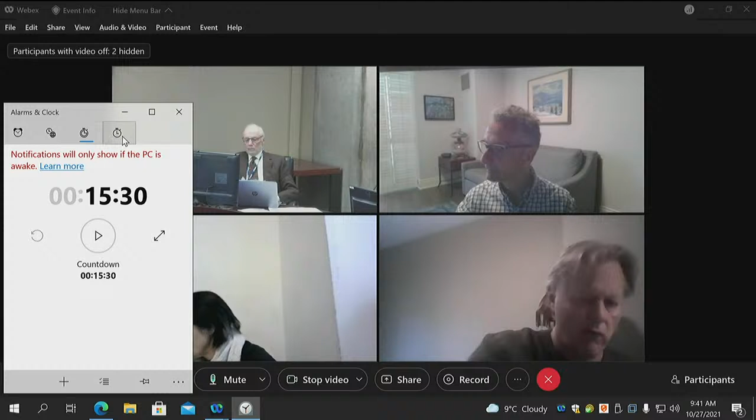Good morning. During the declared emergency in the City of Toronto, Committee of Adjustment virtual public hearings are being conducted by electronic means through WebEx, an online digital platform, and streamed on the Toronto City Planning YouTube channel. These measures are necessary to comply with physical distancing requirements and a provincial order that limits attendance at public gatherings.

This will be a virtual public hearing, and participants who have registered in advance will be able to make their presentations to the committee using WebEx, an online event moderated by city staff. Anyone wishing to view the hearing may do so by watching on YouTube. Participants who have registered in advance will be connecting either by computer, phone, or tablet app, or by telephone. All participants will automatically be muted on entry.

When your item is called, each participant will be unmuted by the moderator, one person at a time. Only the committee members will be participating by video. Any registered participants will be participating by audio only. We ask that you also mute your devices until you are called on to speak.

We acknowledge the land we are meeting on is the traditional territory of many nations, including the Mississaugas of the Credit, the Anishinaabe, the Chippewa, the Haudenosaunee, and the Wendat peoples, and is now home to many diverse First Nations, Inuit, and Métis peoples. We also acknowledge that Toronto is covered by Treaty 13 with the Mississaugas of the Credit.

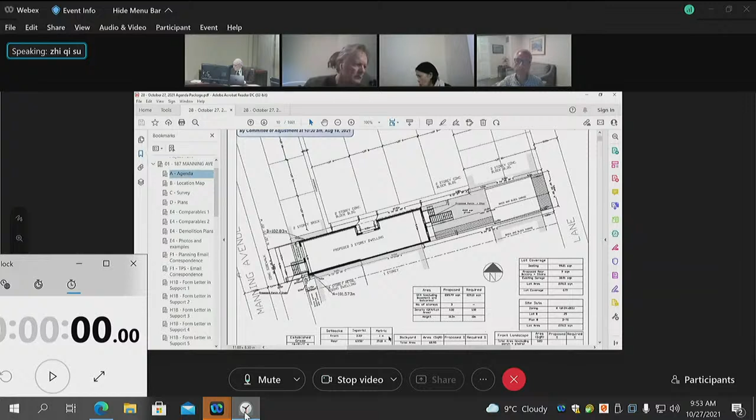We are proposing a full second story addition and third story additions with a stair walkout from the back of the basement. Soft landscaping exists in current conditions, so no variance is needed, and we even have more green space than before. The house is maintained the same as the neighbors, same neighborhood characteristic. As per the support documents, there are other 3-story buildings in the neighborhood.

We also had a chat with the neighbors, and we got 7 letters of support, and so far I haven't noticed any opposition to the application when we talked to the neighbors. But we are welcome to hear their concerns, and then we can adjust it if needed.

Okay, thank you. Panel, any questions? Okay, so let's move to Lena Lynn. Through you, Mr. Chair, Lena Lynn is not online, but Bruce Chow of the same address is. Okay, Mr. Chow. Hi, good morning everyone, I just have a few suggestions. My name is Bruce Chow at 185 Manning Avenue.

So I want to start with variance number 2. The rear second story balcony is located 0 meters from the south side lot line. Could it be set back like 0.9 meters, because it's basically touching 185 Manning, and anyone on the balcony will have a good view into the next building. So for privacy reasons, I strongly suggest the setback.

And for variance number 3, the height of the proposed external main walls will be 9.5 meters, which is 2 meters over the permitted height. Together with variance number 3 and 9, the overall height is 10.3 meters, which is 0.3 meters over the permitted height. Can we go back to the top with the site plan, page 1?

Yes, so can you zoom in here? As you can see, the rear building of 185 is only a 1-story building, so the height difference with 187 will be over 6 meters. As a result, the overflow of rain and snow will fall on 185's flat roof. This creates a serious safety hazard in the future for us. Even with proper maintenance, the overflow of rain and snow would cause leaking.

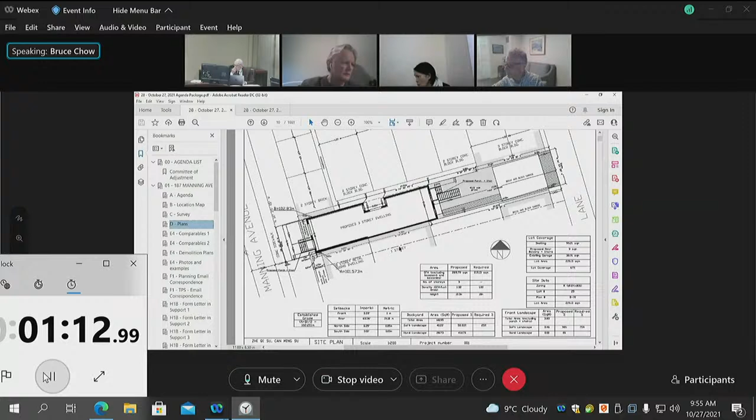The second point I want to talk about is that we also have a skylight on the roof, so it's going to block the lighting because we have a flat roof on top as well.

And then for variance 5 and 6, could we look at the plan comparables Mr. Su submitted? Yes, this one here, thank you. So according to this, Mr. Su provided 3 listings. The first is the height of the exterior walls greater than 10 meters. The second is a building depth more than 18.3 meters. The last is the floor index, more than 1.37. Now, if you cross-check all 3 lists, there's no building that has all 3 criteria.

Additionally, the properties that have height approved more than 10 meters are all attached 2-story buildings. However, in our case, the proposed building is attached as just a 1-story building.

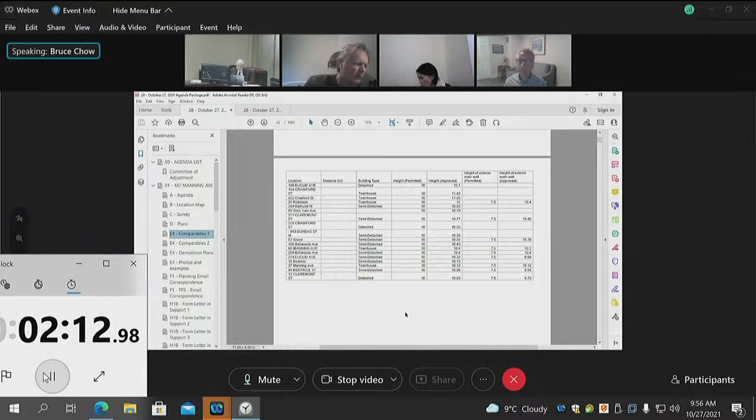Okay, Li Zhang? Yes, here. Can we have your name and address for the record, please? Yes, Li Zhang, 46 Begonia Street. Can we have your submissions?

Sure. I have a main concern and object to variance number, especially number 2 and 4. Number 2, the setback for the rear second-story balcony is supposed to be 0.9 meters as per bylaw. Now the proposed building changed it to 0 meters from the south side. So this change is huge, it's not minor as I understand it.

And also number 4, the maximum permitted height of the side exterior main wall facing a side lot line is supposed to be 7.5 meters, and the proposed building's side exterior main wall facing a side lot line will be 9.5, which is about 26% exceeding the bylaw requirement. So I think those will cause shadowing and overlook impact to the neighborhood property, and it should not be considered minor.

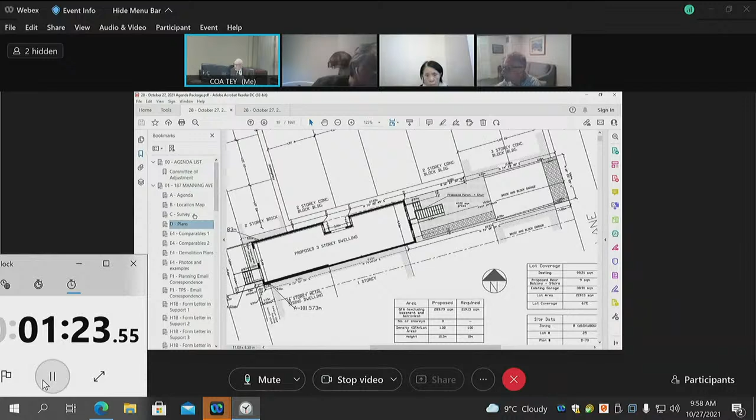Okay, thank you very much. No problem. Mr. Su? Regarding the concern that the neighbor has about the balcony, we are going to have a privacy screen, so there are no overlook issues. And if the neighbor wants us to build a wall on the balcony, there are no overlook or privacy issues. We're willing to accommodate that.

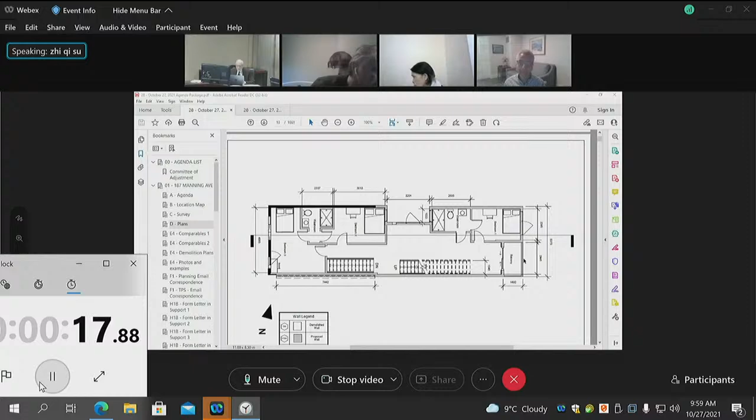Regarding the side exterior main wall height of 9.5 meters, we see that quite commonly in the neighborhood, since some neighbors are building up to a 9.99 side wall building height. Regarding the sunlight shadow impact, we took a couple of photos and have not seen an impact, because the building direction is facing west and east, so we don't see the direct impact because of the building height.

That's based on what we can see. And the length of the buildings, as we can see, 181 is much longer than us as well. And for 183 Manning Avenue, the length is 19 point something meters, or 18 point something, longer than our proposed 18.45 meter building depth. So we believe it's a reasonable length and a reasonable height.

Okay, Panel, do you have any questions? Yes, Nimrod? Yeah, I had a question about the number of stories on the building. If we can turn to the side elevation, I thought I had seen some type of entryway on one of the side elevations.

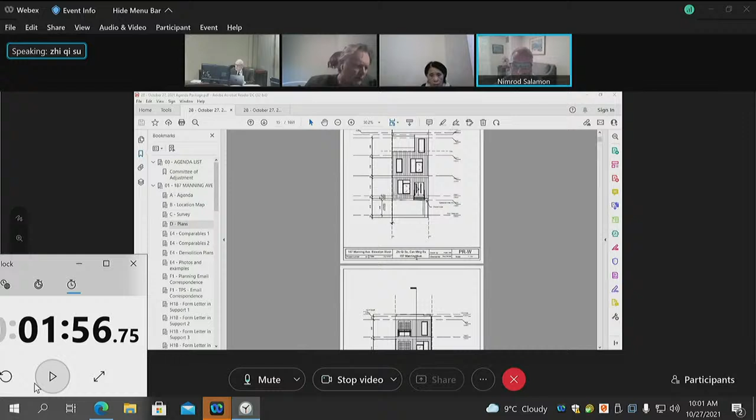So it wasn't clear. Is that a door on that side? I thought that was below grade. That is for the light well, it's not an entryway, it's access to clean up the light well, and that's why it will be there. This is the north side of the building.

I see, so it is a 3-story building on the side. Yes, correct. Thank you. Any further questions, panel? Okay, we go into committee. Anybody have any comments?

Yes, Nimrod? I think there are a lot of variances being proposed. I did have some concern with the balcony, so if this was to be approved, I would suggest there be some privacy screening put up on that rear balcony as well. I think overall, though, the variances in my mind appear to be minor in nature.

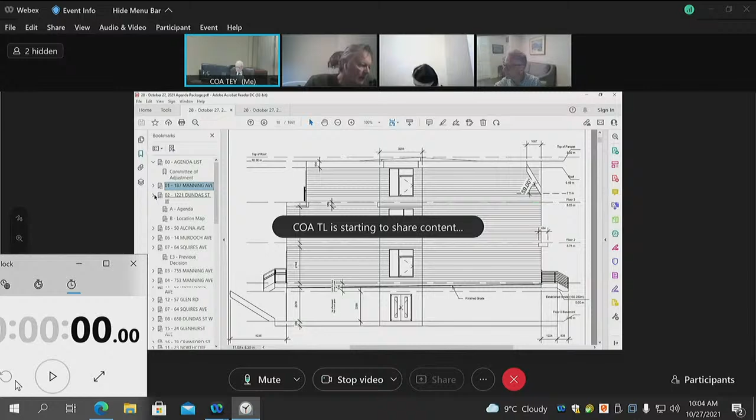Number 2, 1221 Dundas Street West. The purpose of the application is to alter the existing 2-story commercial building by performing interior alterations in the basement and 2nd story to increase the gross floor area.

I've either lost or I don't have number 2, I don't have the sheet for this property. Through you, Mr. Chair, we have the materials submitted by the applicant, a covering letter, as well as a previous decision affecting the subject property.

Okay. Speaker Bob Green, please. Yes, I am here. Could you give us your name and address for the record, please? My name is Robert Green from CGL Architects, and our address is 156 Avenue Road, Toronto.

I don't believe we need a presentation from you. There's no opposition and there's only one variance. Do you have anything you'd like to say to the panel before we go into committee? No, based on what you just said, I don't really have a lot to say.

I did have prepared words. The only thing I would say specifically on the variance is that the completely proposed additional floor area is completely within the approved building footprint and will not alter the approved exterior elevations, and accordingly there will be no adverse impacts regarding setbacks, height, or shadowing.

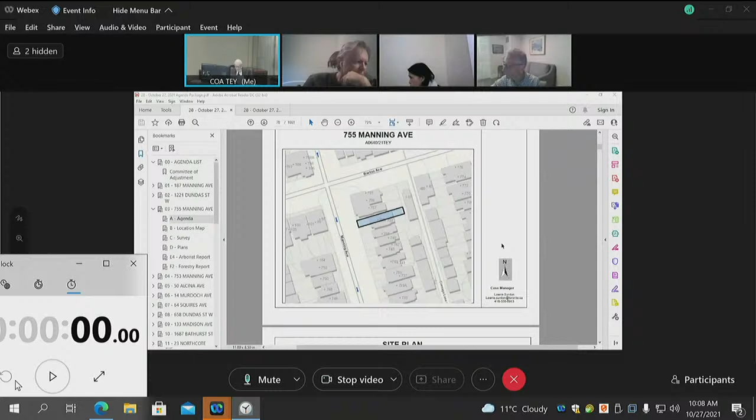Mr. Sandhu? Yes, sir. Can we have your name and your address, please? My name is Raman Sandhu. I am from Marvel Engineering, which is at 151 the Westway, Toronto.

Okay, can we have a very brief presentation? There is some opposition. Sorry, through you, Mr. Chair. All right, just a minute. Go ahead. I'm trying to contact Danny Reeses, which is the interested party, but I can't get hold of him. Mr. Reeses? That's correct.

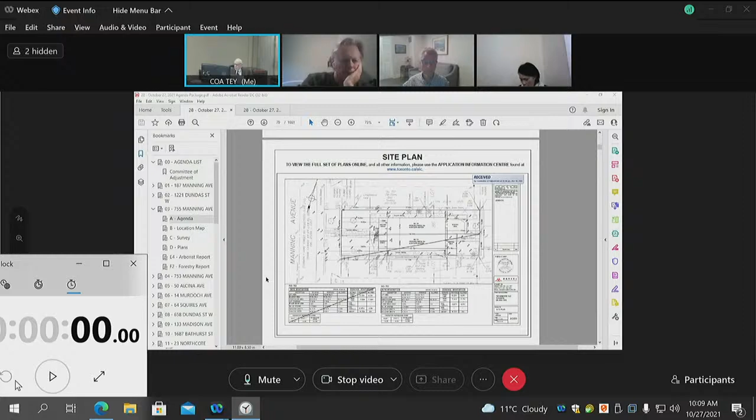Okay, all right, Mr. Sandhu. There is no opposition online, so I think we'll take it into committee. I don't think we need a presentation from you. Do you have anything to say before we go into committee?

No, I mean, the proposal is pretty straightforward. We try to keep the impact to minimum. And if it is Danny Reeses, he is the owner of these 2 properties. Oh, so that might not be real opposition. Okay, it's not real opposition.

Okay, thank you. Panel, any questions? Yes, Larry? Chair, I just wonder if we can note that item 4 is the adjacent door. I just wanted to ask the applicant, the 2 houses you're proposing, are they basically the same houses?

If that question is for me, yeah, the proposal in terms of the building is pretty much the same, but the actual size of the lots is a little different. So if you see the GFA ratios, they are a little different, but the size is pretty much the same in terms of the actual building.

Okay, thank you. Thanks. Okay, any further questions, comments, or do we have a motion? Yes, Nimrod? Yeah, I think the variances are minor in nature, and I know that there are other three-story homes on the street. So I would move approval with Urban Forestry conditions number 1 and 2.

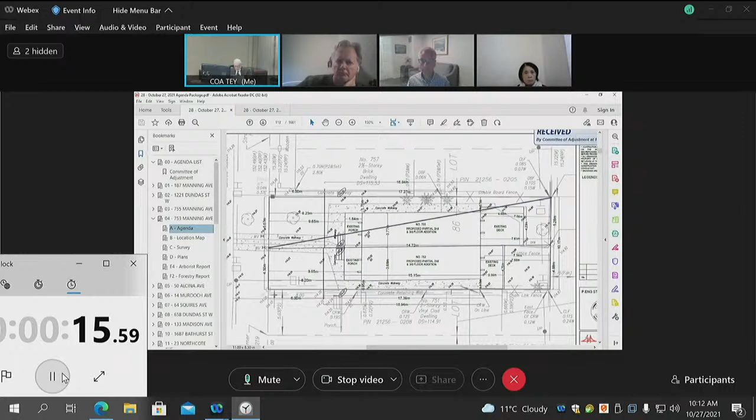I believe you already made a comment on this when asked a question by Mr. Clay. Panel, do you have any further questions, or can we move to a motion? I would move for a motion. This is similar to the previous application. In this case, there are only 2 variances, and I believe they are minor in nature. I would move approval subject to urban forestry conditions 1 and 2. Yim, do you second that motion? All in favor? You have your approval, sir. Thank you.

Okay, number 5, ALCINA Avenue. Purpose of this application is to construct a new 3-story detached dwelling and a rear 2-story ancillary building containing a laneway suite. With this application, we have material submitted by the applicant, a report from engineering, and 10 form letters in support.

Mr. Barrett. Good morning, committee members, Mr. Chair. I am Graham Barrett of 1575 Dundas Street West, agent for the owners of 50 ALCINA Avenue. I don't believe we need a presentation. There's no opposition. Mr. Barrett, do you have anything to say before I take it into committee?

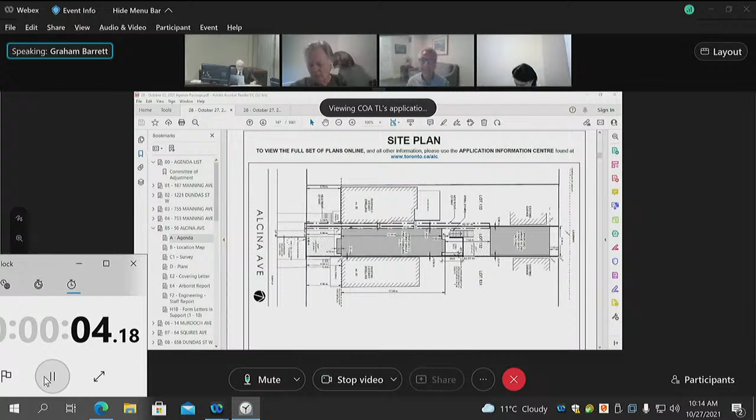Yes, just 2 quick points. We did receive an additional letter of support from 54 ALCINA, which is a late submission - I've sent it to staff. We appreciate their support in this matter. Also, I'd like to mention the ECS report. I've read through it, shared it with the designer, and active or passive fire protection can and will be installed. There's also a fire hydrant located in front of 54 ALCINA, which according to my measurements is approximately 38 meters from the ancillary buildings. So all conditions in that report can be met.

Thank you. Panel, do you have any questions? Yes, Larry - just a quick one. First of all, it was great to see a laneway suite that doesn't have a height or width or depth variance, so thank you for that. I just wanted to confirm the 45-degree angle plane. It looks to me from the plans that it's a very small portion of the laneway suite that intersects the 45 degrees. Is that your interpretation as well?

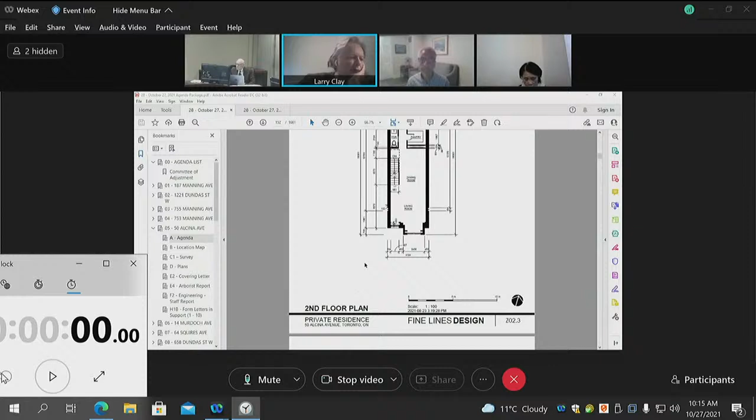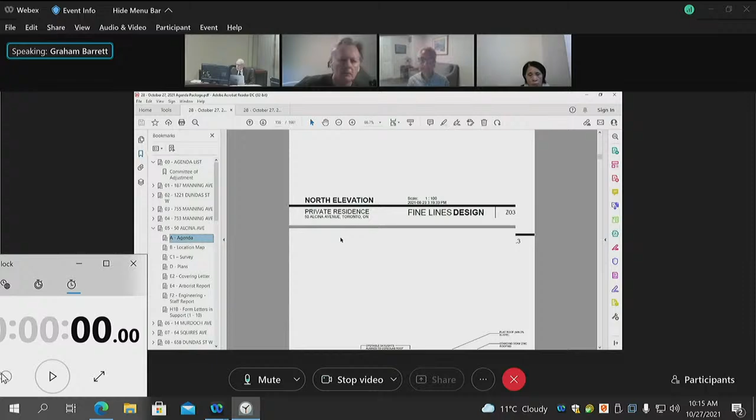Absolutely. If you look at the presentation materials I submitted, there's a cover letter and several images, with a highlighted version of the plans. If you scroll to the east elevation of the laneway suite, that should be page 8. You will see the very small corner of the second story that projects into the angular plane. I'm not sure if you're looking at the correct file, but my cover letter and supporting material - it should be page 8. So that is where that variance is. If you go to the next page, you see it from the other elevation. It's an exceedingly minor projection into the 45-degree angular plane.

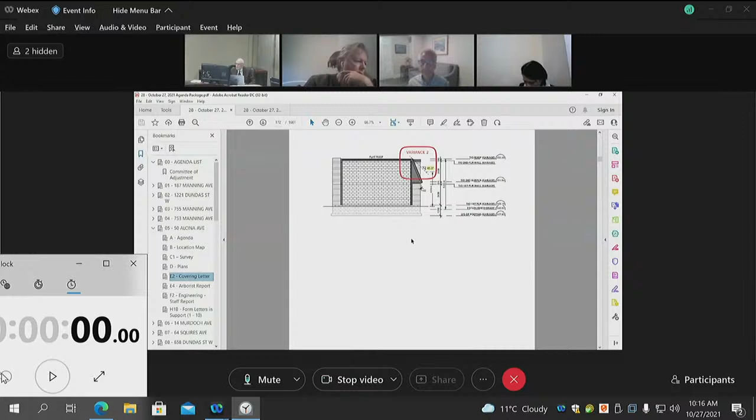Okay, any further questions? Any comments, or do we have a motion? I'm happy - I thought this was a really good proposal. I thought the lane for the new laneway suite was appropriate for the neighborhood, and I'm pleased to see very few minor variances requested. These are the kind of applications we love to see. It fits in with the neighborhood, and the community support from the neighbors and surrounding area is good. I'd like to move approval of the application subject to the standard engineering conditions.

Okay, Larry, you're a little garbled - I don't know whether you can move closer to the speaker, but your speech is a little garbled. Is that better now? Yes, okay, I apologize. It's okay, I was very eloquent in my first portion, I don't want to repeat it, but... No, it's fine, we heard you, but it was just a little garbled.

Okay, Nimrod, are you seconding the motion? Yes. All in favor? You have your approval, sir. Thank you, wonderful, thank you very much, have a great day.

Number 6, 14 Murdoch Avenue. The purpose of the application is to alter the existing 2-story semi-detached dwelling by constructing a rear second-story addition. With this application, we have material submitted by the applicant.

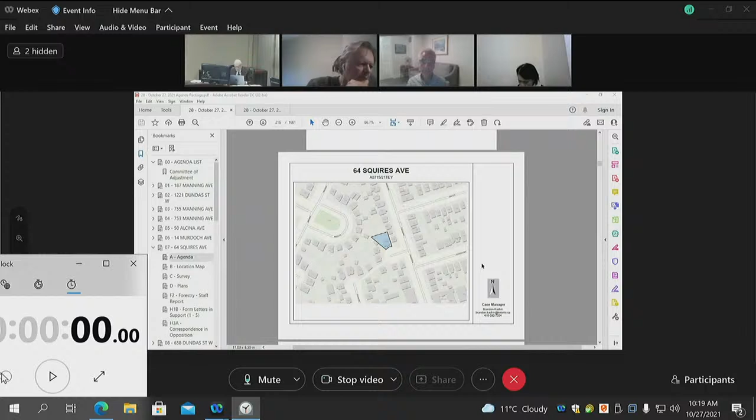Dale Theriault. Good morning, Mr. Chairman, committee members. I'm Dale Theriault, the agent and applicant for this file. Could we have just a very brief idea of what you're doing here, what the variances are?

Absolutely, sir. We're proposing to construct a new 2-story house, demolishing the existing 1.5-story house on the property. We're looking at minor variances for the front yard, side yard, and rear yard. Most of them are very minor and more technical variances, particularly in the front yard. The main reason we're asking relief is the existing house doesn't even meet the current bylaw.

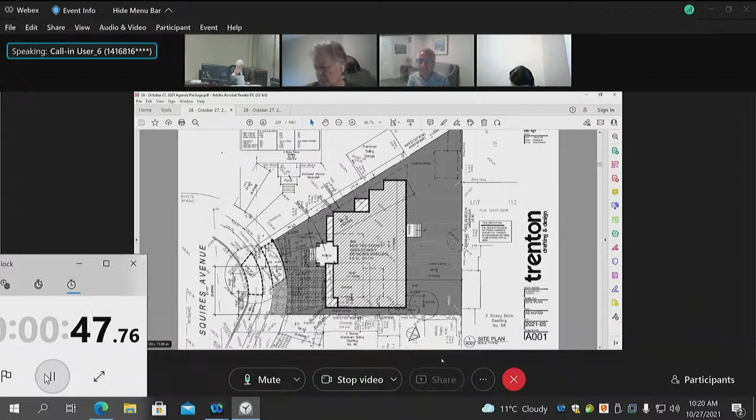The current house has a setback of 2.57 meters. The required is 6.13, and we're requesting 5.1. For side yards, we're requesting relief going from 1.2 down to 0.9. For the rear yard, we're looking for relief going from 7.5 to approximately 7.4, so they're very minor in nature. We're also looking for relief on coverage, going from the maximum permitted 35 to 40%, and for GFA, an increase from 0.6, which is permitted, to 0.63.

Okay, thank you. Panel, do you have any questions? We go into committee. Any comments, or do we have a motion?

Nimrod: While there are quite a few variances proposed, I believe they are quite minor in nature, so I would move approval of the variances with conditions, urban forestry condition number 1. Do we have a seconder? Larry. Thank you. All in favor? Approved, sir. Thank you.

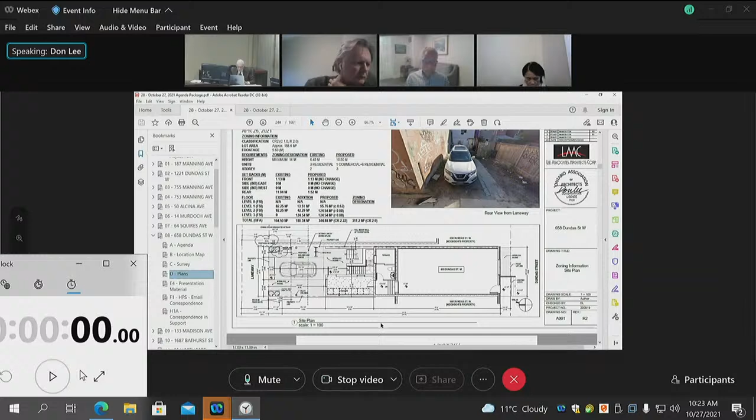Dong Hwan Lee. Hello. Hi, Mr. Chair and committee members, thank you very much for your time today. I'm Don, the architect, on behalf of the owner, 45 Shepherd Avenue. The existing building has 2 stories above grade and 1 below, in the CR2 zone.

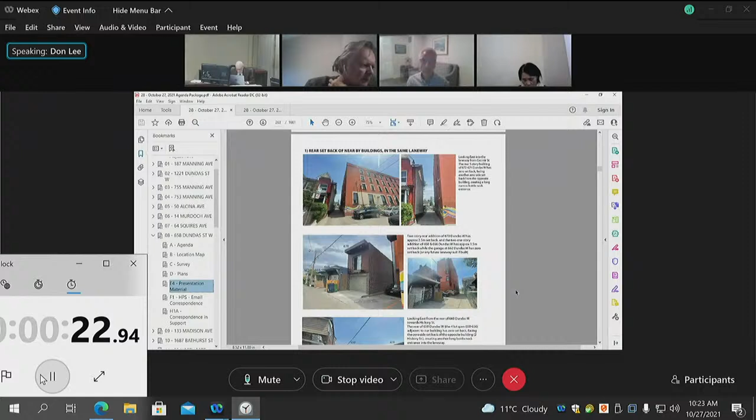There is 1 dwelling unit on the ground floor and 2 dwelling units above. The proposed design converts the ground floor dwelling unit into a retail commercial unit, and the 2 dwelling units on the 2nd floor into 3 dwelling units by adding 1 more unit inside the addition. A new 3rd floor addition will also have 3 dwelling units, so there are 6 dwelling units and 1 commercial unit in the new proposed 3-story building design.

On the progress of the proposed design, some minor variances came out. The rear yard setback required is 7.5 meters, whereas the proposed setback is 5.54 meters. As you can see in the picture on the drawing, or the supporting document, many existing neighboring buildings are sitting on rear lot lines or very close to the line.

Second, the non-residential unit on the ground floor must be on the street level or accessed by only under a 4% slope ramp. It is almost impossible for the existing building with a small lot. This is very common, as referred to in the pictures.

Floor space index of a mixed-use building is 2 times the area of the lot. This proposed plan has 2.22 times the area of the lot, so around 33 square meters exceed the designated 311 square meters.

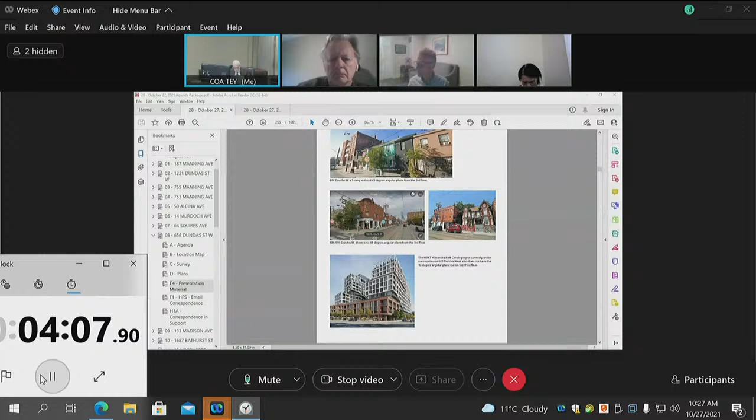Well, we're still having trouble hearing you. Can you hear me? We can hear you, but I don't know whether you're swallowing your words or the mic's swallowing your words. We're only hearing a portion of what you're saying. But I understand you've set out the 3 variances that are on our notice, so do you have anything more to say before I go to the opposition? No, that's it. Okay, thank you.

David Ciobotaru. Yes, can you hear me? Yes, we can. Can you hear me? Yes, we can hear you. Thank you. So I'm here on behalf, I'm a licensed paralegal, and I was retained by the tenants who reside in the unit.

The tenants are vehemently objecting to any variation here. All right, sir, can we have your name and address for the record?

Of course, my name starts with initial D for David, my last name is spelled Ciobotaru. My address is 385 Connie Crescent, Vaughan, Ontario. What's the postal code here? No, it's okay, we don't need your postal code, sir.

Thank you. So could you tell us what your client's objections are? My client's objection is that they've been residential tenants. One of the clients actually owned the house at some point. It's a residential house where they've resided for in excess of 20 or 25 years. It's been through a few evolutions of landlords or owners of the property, and there have been many attempts to evict these tenants for various reasons. This is their home.

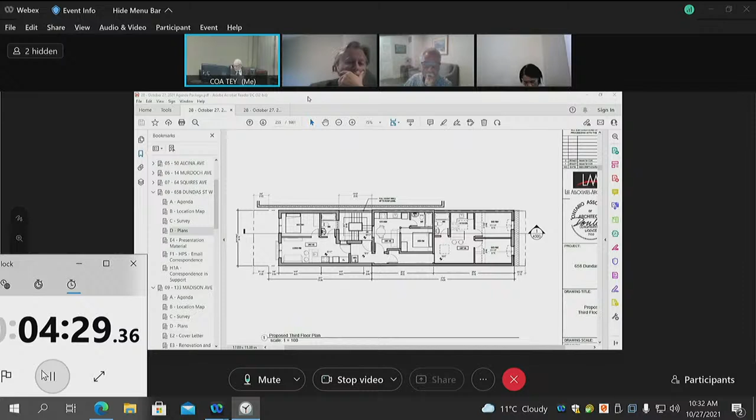Okay, and what we didn't hear is whether, if this is approved, will they have to be uprooted in order for this work to be done? Well, where are these people going to go? I don't know that, and that's, as I said, not within our mandate, but we will go back to the agent once we have heard from all the opposition, and perhaps he will have an answer for you. So do you have any further submissions? Your time is running short.

Okay, I'm just going to close by asking the committee to consider the rights of the individuals who are going to be impacted by this action.

Thank you. Sir, do you represent all the tenants? There's a Mr. Lazarus who's listed. Do you represent him? Is it Ray Lazarus, Cat Lazarus? No, sorry, I'm representing Ray, Linda, and Quan Lee.

Okay, thank you. Nimrod, you have a question? Yes, I do. My question is, based on the floor plans, can you tell us where these individuals currently live on those floor plans?

And are their existing units going to be affected by the proposed new floor plans, if you can tell?

Is the question for me? Yes. Thank you. So whenever you have construction to the degree that you're proposing, these people are not going to be able to continue residing there.

It doesn't appear that way. Where are they going to go? You're going to construct, you're going to cut off the power, the water, and all that. I mean, these are human beings.

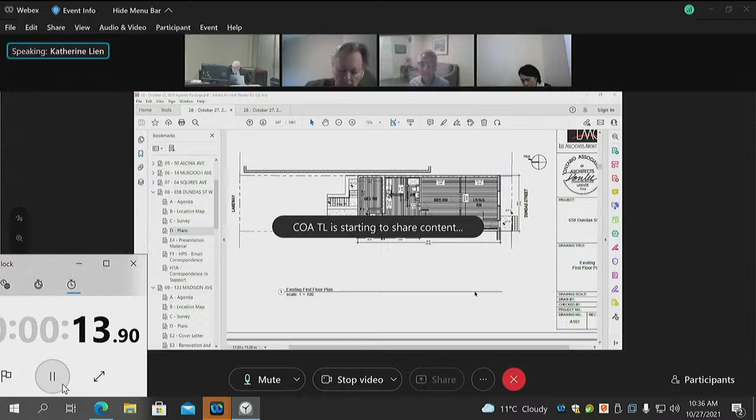Yes, there will be 6 new units, but if you look at the floor plan, 2 of them are quite small, under 400 square feet, and the other 4 units aren't suitable replacements. So yes, there are more units, but they're not quality units, they're very small.

Could you please speak into the microphone? I'm having a little trouble hearing you. Oh, sorry. That's better. Yes.

So the current tenants would be evicted from the main floor, which under the proposal will be changed into a commercial unit, and there are no suitable replacements because the 6 new units created are too small. 2 of the units, the middle ones, look to be about 400 square feet.

And more importantly, the current tenant, my mom, she's really old. She has some accessibility issues, so she needs to be on the first floor.

But the new 6 units, to access them you can only go through the stairs, and the only entrance is through the back.

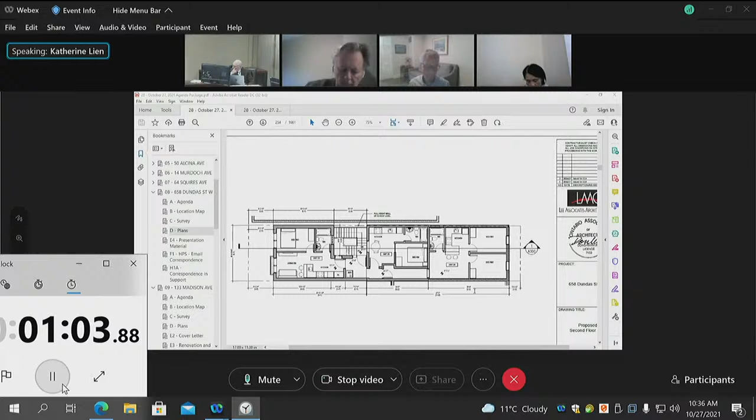And to get through the back, you have to go around from the main street, around into the laneway, and the laneway is not paved, it's not plowed in the winter, so there's lots of snow.

So it seems like a small variance. I guess this addresses the first variance, which is asking to omit the ramp or the commercial entrance.

So it seems like a small variance, but what it's doing is taking away one of the few main floor apartments in their neighborhood for a vulnerable portion of the population, and giving 6 inaccessible, more expensive units in the back.

And I also mentioned this is a multi-generational home. We've been living here since 1996. My sister went to school across the street. I graduated from school across the street, and now I have a child, and I come visit my parents very frequently, and I take them to the school across the street. This is a fantastic neighborhood for raising a family, for people of all different walks of life, because there's access to fresh food in Chinatown, there's a library, there's schools, there's a hospital.

And what this proposal is really doing is taking affordable housing from people and just changing it into a commercial storefront for profit, offering to replace it with 6 units that people can't really live in for a long time. These units aren't family friendly. If you look at the 6 units, you have to walk up 2 flights of stairs. If you have a family, how could you possibly go up and down with a stroller in the winter? And it's a barrier to access. The rent prices will be through the roof after construction, and the current landlords have not informed us about any of this. They've offered no replacement units, no compensation.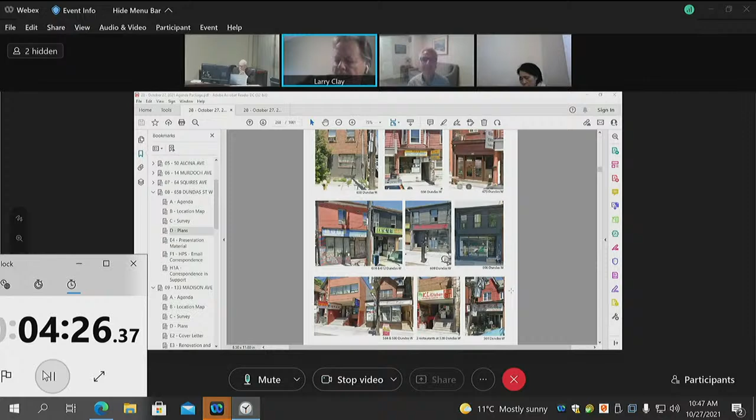Yes, Larry. I had the same concern. The reason those retail at-grade storefronts don't have ramps is that they are pre-existing and existed prior to the AODA being brought in. The fact that we're converting a use from residential to retail would in fact require accessibility compliance. So I don't think I need to reiterate it, but that was a pretty major concern on my part, not providing accessible access to the retail at grade front.

I'd also make the observation that as sympathetic as we are to the tenants, who are not before us today, Chair, you mentioned landlord and tenant, and there are provisions within that legislation that address these kinds of situations. I think we'd all recommend, if this gets approved, that the tenants pursue their legal rights under that legislation, the LTB.

All right, any further questions? Any comments? Are we going into committee? Any comments, or do we have a motion?

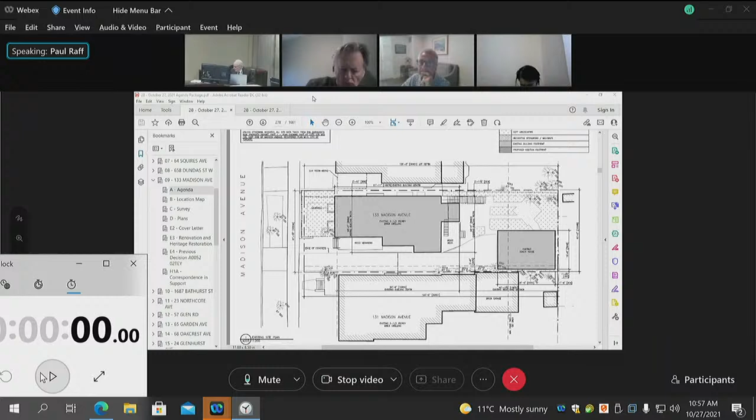Heritage does. We've had a detailed review - it is a heritage restoration project, and 2 out of 3 variances are for existing parking conditions. The variance requested is just for building depth, 22.395. Most of the excess building depth, as per the diagram we submitted, if you do want to look at our support materials, is subterranean - it's underground, it's not visible, it's in a rear yard storage space under the addition.

Yes, this diagram shows it, if you'd like to zoom in on that. There's the allowable building depth at the top, 17 meters, the proposed at the bottom, but it includes the below grade portion - it's only 19.33 building depth if you count what you actually can see from above grade anywhere. This is very much in keeping with the neighborhood - you can see how it relates to the neighbors on either side, both of which are in support of the application, and it's only 0.84 meters longer than the building is currently. Okay, thank you sir. Panel, any questions?

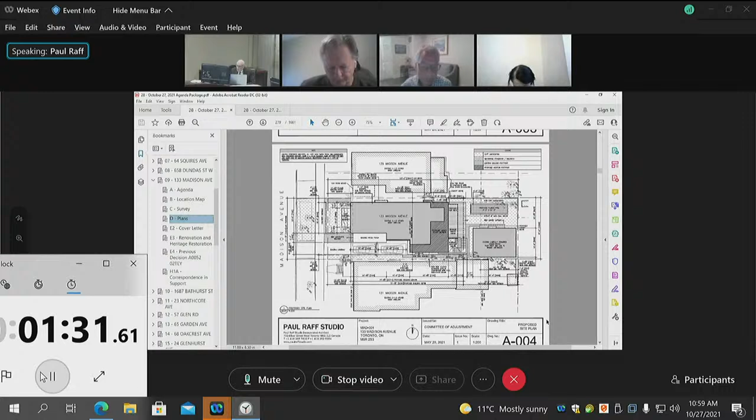Thank you. Okay, we'll go into committee. Any comments, or do we have a motion?

Yeah, my only comment would be is if this was to be approved, if we could add a condition that it be tied to the site plan. Yes, I think it's a good idea. Okay, so Nimrod, would you make a motion?

Sure. I think the variances are minor in nature, and I would move approval of the variances subject to heritage planning conditions and condition that the building depths be tied to the site plan.

All right, Yim, you second that motion? All right, all in favor? Have your approval, sir. Thank you very much. Number 11.

23 Northcote Avenue. Purpose of the application is to alter the existing 2.5-story townhouse by constructing a rear 2-story addition, a north side second floor bedroom walkout to the rooftop balcony, and construct a rear 2-story ancillary building containing a garage and a laneway suite.

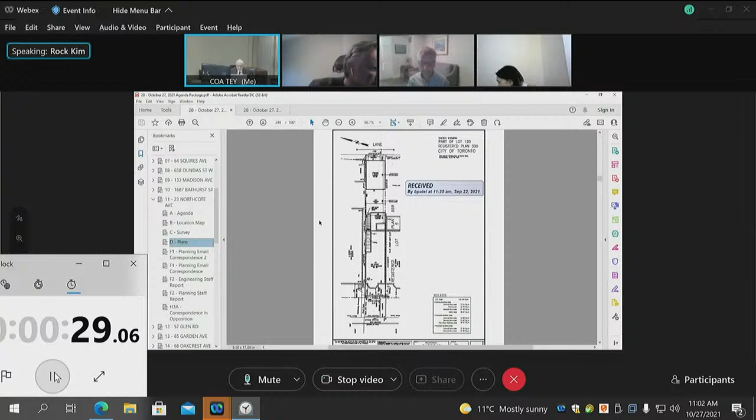Okay, we want to make the rear side 2-story addition of the existing house, and then the laneway house addition. We are trying to make the right north side shorter than number 25 and a little bit longer than number 21 of the addition part. At number 19, we are shorter; there is a house at 19, and 11 is longer than what we propose for the length of the house.

And then we are over the maximum requirement for gross floor area, which is 100%. We are over by 8%, at 108%, with what we are trying to do. And then for the laneway house, and the addition of the 3rd floor balcony, the owner wants to make a green roof space for maintenance access, but we are willing to change it to a flat roof.

It doesn't really matter, but it's not part of the committee, so that's why I didn't talk about this part. But we're going to negotiate with number 21, and we will talk about that because we are neighboring, right? So, and then for the laneway house, we have a setback from the backyard of 1.5 meters.

On your drawings, you're showing it in Imperial, first floor 10 feet, second floor 8 feet, and also 2 feet. What is that? Is that a railing? We want to make that like a roof, a green roof, so it's for maintenance access, the elevation safety. No, that's not what I'm asking. I'm asking what is 6.6?

Because in the variance it says you're asking for 6.55 height. Does that include the 2 feet of railing or roof or whatever it is? Yes, on the side elevation, that's including it. Yes, that's the 2 feet above the roof.

Railing for hooking up, for safety. Only on one side, yeah, only one side. Probably could be in the middle, but. And then the 6.55 meter, does that include the 2 feet? Yes, that's right.

If you minus the 2 feet, what is the height? Is it 5.94 meter? 5.9, so it will be in compliance with the height. That's correct. Yes. Okay.

All right, thank you. I just want to make sure, is that railing necessary, the 2 feet railing? Because it's not a proper railing anyway, right? Railing is 3 foot 6. This is not really a railing, it's a safety issue, they can hook up, it's not for the safety. It's for the maintenance of the green roof, but actually we can get rid of the green roof if it's not really necessary.

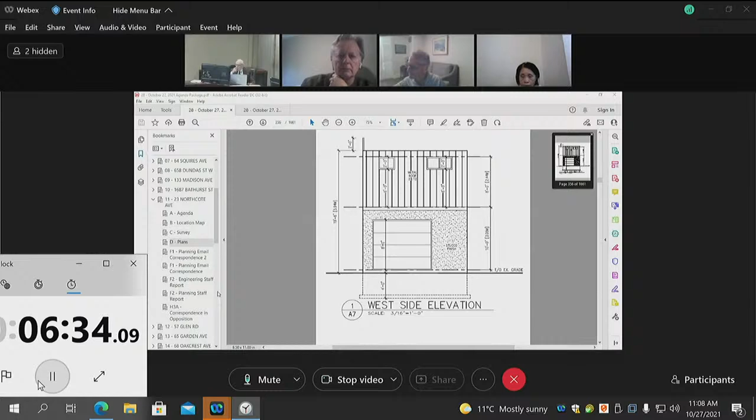Okay, that's why I thought to make sure that the extra height is not added to the Laneway house height. I'm not too sure why the railing is part of that.

Apparently that's a recommendation of planning, a railing on one side. It looks like it's more of a parapet than a railing, though, right? So maybe the nature of it would require it to be considered as part of the height.

Okay. Any further questions of this witness panel? Okay, Mr. Taggart, Ms. Berry.

Hi there, this is Madison Berry speaking at 21 Northcote. I don't have anything more to add than what was in the letter. While all the variance requests are minor in nature, the combination of requests does have us very concerned about the items mentioned in my letter. We've spoken with the owner, so we're not opposed to the creation of the Laneway house. Again, it's just a lot in combination with the other requests. So we're happy to continue that conversation with the owner, but no further commentary to add.

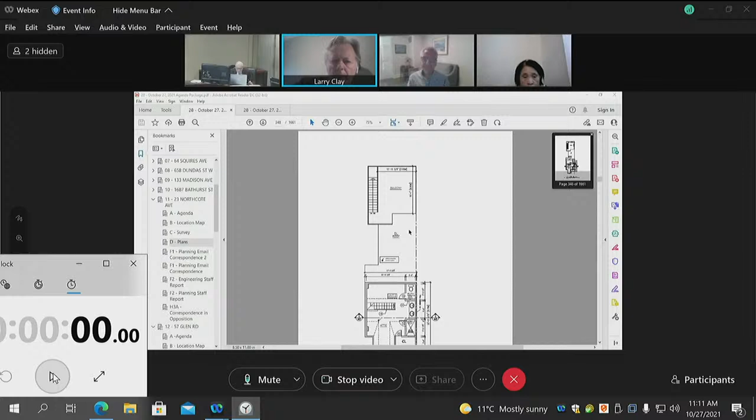Larry, I actually have a problem with the height for the Laneway house only because they're already asking for a reduced setback to have 6 meters, and we approved a lot of Laneway houses that have tighter setback but we still kept it at 6 meters. In this case, I would like to refuse the height variance for the Laneway house because they already gained some reduction. It was only if it's a reduced setback from the main house, they only allow 4 meters.

Okay, so I think even the drawings show that 6 meters will work for them. I think maybe we should just limit it to 6 meters, so maybe we can go back and look at that.

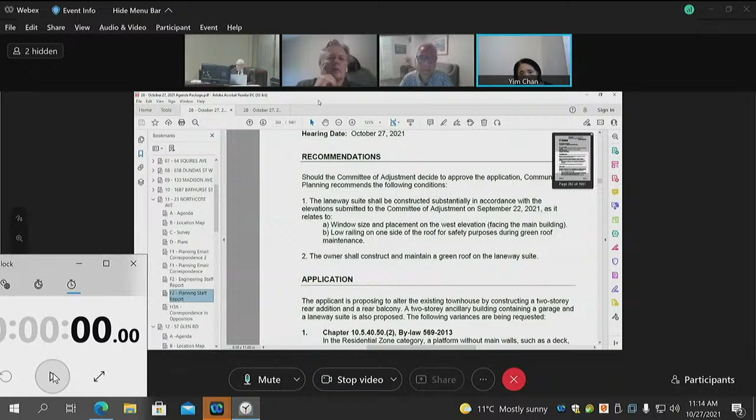Okay, so in that case, maybe we should tie it to the drawings then. I would agree with that, to add a condition that we tie the drawing, the height of the laneway suite, to the drawing so that it's clear what is allowed to go to that height.

If that's already in there, fair enough. I must have missed it when I was reviewing this. Okay, any further questions, or do we have a motion? Sorry, I'm just looking at the planning report, maybe we can just go to that to see if there is in fact a condition, just to make sure.

It has two conditions. Oh, so there does not seem to be a condition about the main building privacy screening. I had thought I had seen that. Maybe it was in their comments and it never got in.

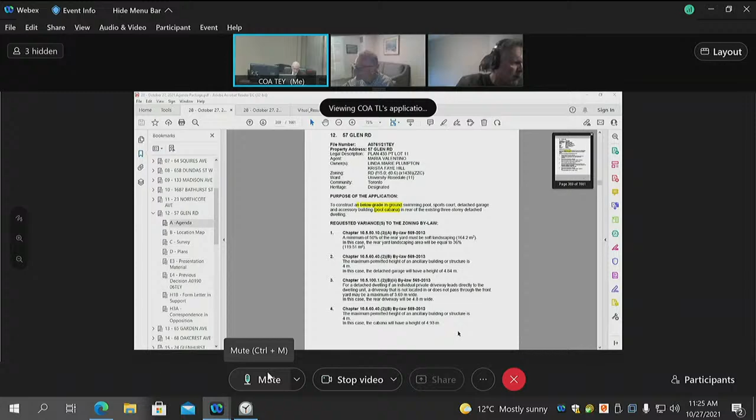Mr. Goldberg? Yes, good morning everyone, I am here. Can we have your name and address for the record, sir? Yes, my name is Michael Goldberg. I'm a principal at Goldberg Group, 2098 Avenue Road, Toronto, M5M 4A8.

All right, I don't think we need a presentation, there doesn't seem to be any opposition online, at least. Panel, so Mr. Goldberg, before we take it into committee, do you have anything to say to the panel? I'm aware of the letter from 38 Maple, and I have comments to provide if the committee would like to hear them. Otherwise, I'm quite happy not taking up the committee's time. All right, so perhaps you could address the issue raised by 38 Maple. Sure.

What I can indicate is 38 Maple is not adjacent to this property. It's one property removed. In between 38 Maple and the subject site, there is a distance of 60 feet or 18 meters. And in addition, you can see at the northwest corner of the adjacent house at 36, there's a very large two-story coach house. That coach house is 7.2 meters high.

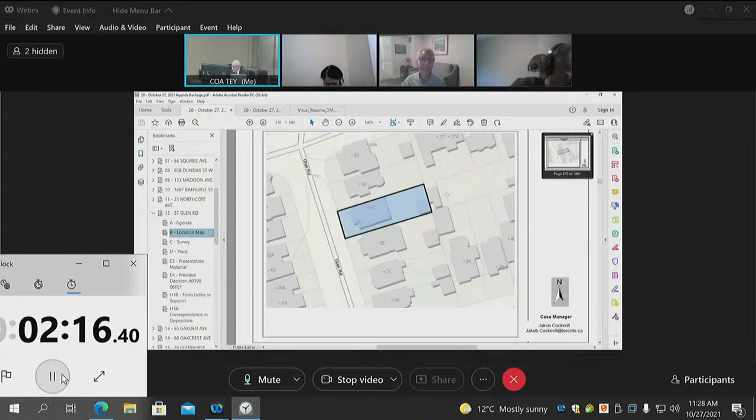Mr. Goldberg, could you just tell us what the sports court is? Is it a full basketball court, a tennis court, or what is it? Oh no, it's actually a rather small area, probably a quarter of a basketball court. It's like one side where someone could have one hoop and take shots from a foul line. There may be other equipment put in there, but that's the general size of it.

Okay, so it's less than half court. Oh, it's less than half court, yeah.

Okay, so do you have anything further to say, Mr. Goldberg? I don't. I would just say that if you look at the existing survey, the driveway is basically much more narrow than the existing driveway is today. There already is a basketball court in the widened part of the driveway today, and both the cabana and the proposed garage will be lower than the adjacent coach houses.

Which are straddled on a zero lot line to our east lot line, both of them there. So there is an opportunity to add landscape open space by way of a green roof on the garage because it's a flat roof, and we would be prepared to do that, and that would increase the landscaped open space from 36% to 41.5%. I leave that in the committee's hands as to whether you wish to make that amendment to the application or not, from 36 to 41.5 in variance number 1. We are fine either way.

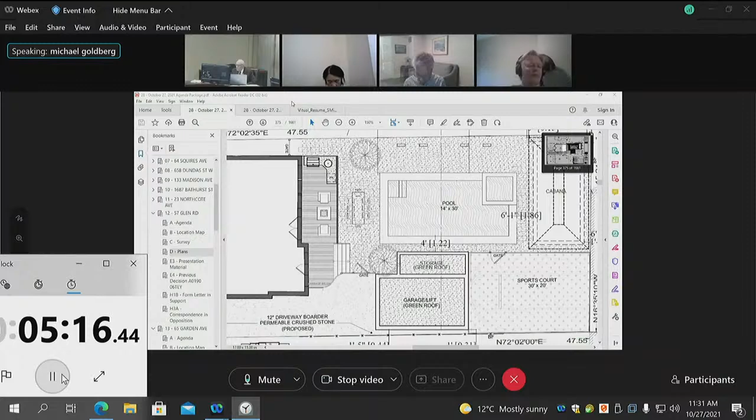Okay. Any comments, or do we have a motion? Yes, Nimrod? I believe the variances are minor in nature, and I would keep variance number 1 the way it is, and just add a condition of approval that there be a green roof on the storage shed and garage as shown on the site plan. Okay, do we have a seconder? Larry? All right.

Perhaps Sabrina, if we make it a condition that there be a green roof on the garage and storage, do we have to change variance number 1, or should we just approve it that way and make it a condition as Nimrod suggested? Through you, Mr. Chair, I believe the motion that's before us is okay to move forward with. Okay, so yes, the green roof on storage shed and garage as shown on the plans. Right, thank you. Okay, all in favor of the motion? You have your approval, Mr. Goldberg. Thank you.

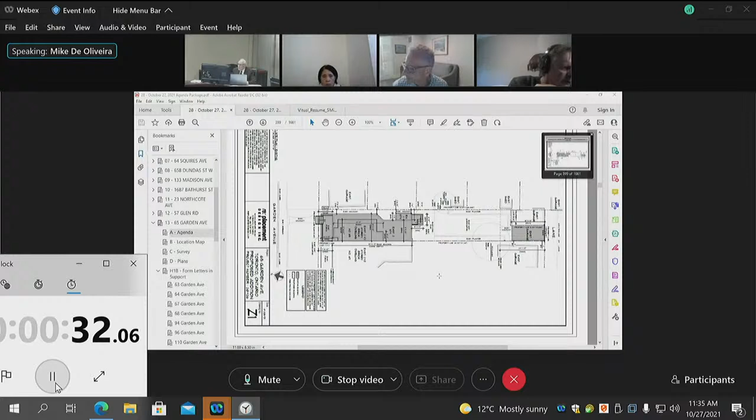Thank you. Panel, do you have any questions, or do we have a motion? Yes, Yim? I agree with the applicant's presentation. I think it's a straightforward application and there's no opposition. I move for approval with no conditions. Seconder?

Yeah, I did, maybe just before we go, I just wanted to acknowledge the applicant did a really good job of getting all the adjacent surrounding neighbors to support this, which means they've had several discussions with them. So that's the kind of stuff we really like to see on these applications. So I'll say that and second the motion.

All right, thank you. All in favor? You have your approval, sir. Thank you. Thank you very much.

Okay, number 14, 68 Oakcrest Avenue. Purpose of the application is to alter the existing two-story semi-detached dwelling by constructing a rear two-story addition and a rear ground floor porch. With this application, we have material submitted by the applicant, six form letters in support, and a report from Urban Forestry.

Audrey Kvedaris. Good morning, Mr. Chair and members of the committee. My name is Audrey Kvedaris and I live at 1 Ethelwyn Avenue, and I'm the agent for the project. Right, thank you.

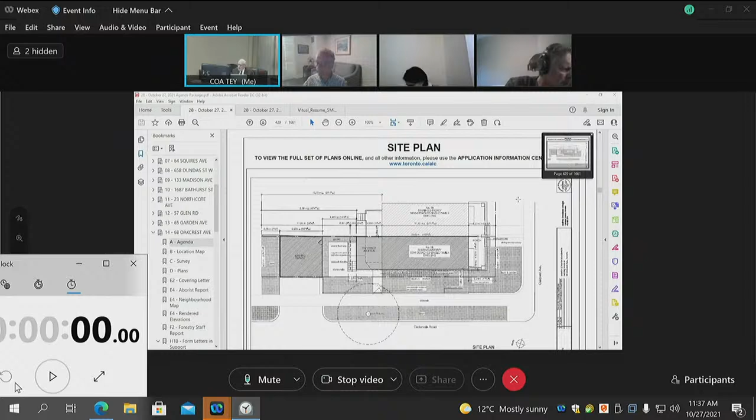We only have one variance. I don't think we need a presentation. Do you have anything to say before I take it into committee? Just one point in relation to the supporting plan that illustrates other minor variance applications in the area: the 0.81 is the average variance that was approved, and for homes of that vintage in the immediate area, 0.83 is the median approved gross floor space index.

Thank you. Panel, any questions, or do we have a motion? Yes, Nimrod? There's only one variance, like the chairman said, and I believe it is minor. The rear two-story addition is quite small, only 32 square meters in size. So I would move approval of the variance, and I believe there's a condition from Urban Forestry. Yes. Seconder? Yim? All right, all in favor? You have your approval, thank you.

Number 15, 24 Glenhurst Avenue. The purpose of the application is to alter the existing two-story semi-detached dwelling by constructing a rear ground floor deck. With this application, we have material submitted by the applicant, support from 26 and 22 Glenhurst, and four form letters in support from other addresses on Glenhurst Avenue.

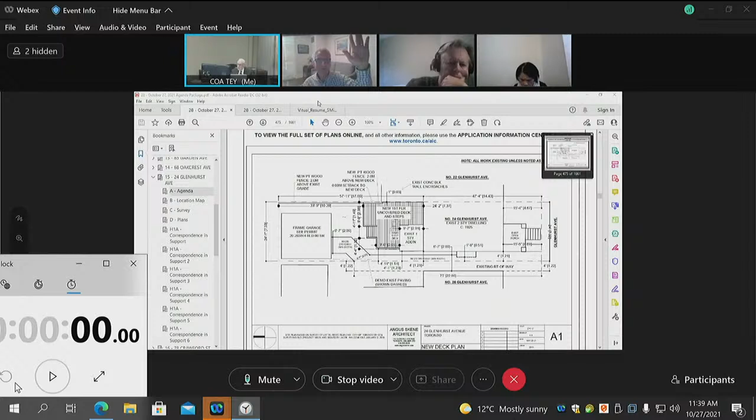Okay, so there is someone who wants to speak, I believe, in opposition. Through you, Mr. Chair, attempts were made to contact Marita Bellotta, but we couldn't get through. Oh, okay, there's no opposition then. So I'm going to take it into committee, Mr. Skene. Do you have anything to say before we take it into committee?

I actually do, in the sense that the owner spoke with the immediate neighbor, who I believe is the woman who wanted to speak in opposition, and I sent something through very early this morning. They had met last night, the two neighbors. My client, the resident of number 24, sent an email confirming the nature of their discussion last night. I just got that this morning, and staff were kind enough to send it to you as an email. It'll be in the supplementary information, but it shows that agreements were made, and none of the concerns had anything to do with the minor variance as such—it's deck issues and things like that. I can read the email if it's not accessible, if that's of interest.

Yeah, I don't—through you, Mr. Chair, that email came in this morning and it's up on the screen now. Can't read it, it's too small. Tiffany, can you—yeah, that's better. Nimrod, you have a question? Yeah, can we put up the site plan, and can the applicant explain how the rear yard soft landscaping is being calculated, and what's underneath the first floor deck and stairs? Yeah, for sure.

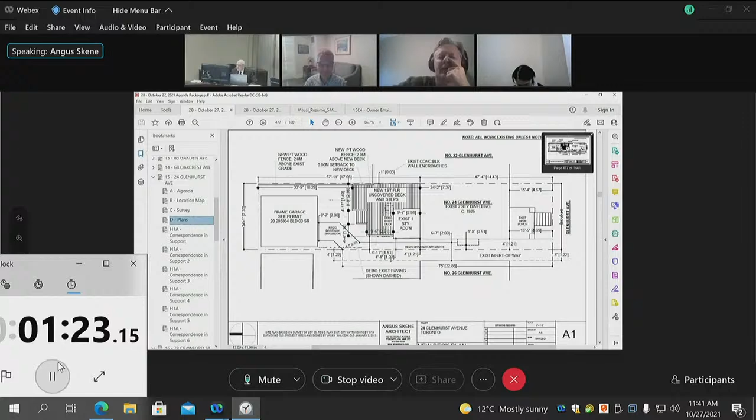The better drawing for rear yard soft landscaping is to click one page in on the PDF to the landscaping calculation. Does that help a little bit? So what you're seeing there is the way the bylaw works.

It delineates the rear yard initially to create the area that's called the rear yard. It then requires a 50% amount of soft landscaping. Now, anything that's hard landscaping in that rear yard area, such as the garage, the driveway that's required to reach

the required parking space, and the deck will all count as hard landscaping. So we end up with, if you look at the large calculations at the bottom, it says rear lot area, 120 square meters, soft LOS, which is landscape open space required, equals 50%, which equals 60. We provide 37. So the 37 number you see on the drawing with all those little dots, which are supposed to represent grass, that's the soft area. Everything else is considered hard.

And the truth is, with this property, like most of the properties in this area, underneath that deck is mostly already a concrete patio that's existed for years and years. And folks just prefer to be at the level of the first floor if they can. So much of what's being covered with the deck has always been covered with pavement. And I think actually we're pulling up a fair bit of pavement to create this new soft landscaping. So it's kind of a happy ending for the bylaw provision in that sense.

So you've increased the soft landscaping area? Yes, I think we have, yes.

Is the parking, is the car actually parking in the front yard as opposed to at the back? No, the way it works is these properties are required to provide the parking space in the rear yard, and a parking space has certain dimensions, as does the driveway. But if the driveway, under the bylaw, leads to an approved and required parking space behind the main front wall, you are allowed to park your car in the front yard on that driveway.

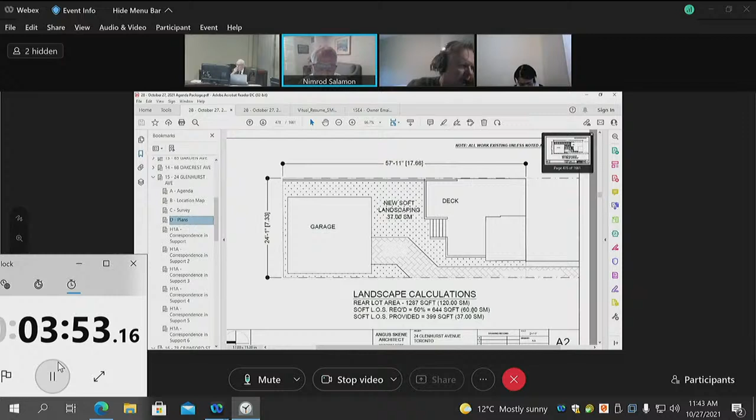So what material is the driveway in the rear yard, leading to the garage? On these kind of, to be honest, when I do these homeowner drawings, I'm according to the bylaw. So if you could click back, I don't know if I specify a material. If you click back on the site plan, it probably just says required driveway minimum width.

And on the drawing A2, if we click back to the soft landscaping one, sorry, I think you're going to find I haven't specified it. The little hatching pattern I'm putting down is a vague idea about interlock or something. But with these homeowner projects, my main thing is to make sure the homeowner understands the bylaw, like what is hard landscaping, what is soft. And homeowners make so many discretionary choices down the road with their contractors that I've long since stopped specifying a particular material.

But could you provide using permeable material for the portion of the driveway located in the rear yard? You know, the only permeable material is a funny thing because... I don't mind, and in fact, what I did today as a caution is I told the owner to sign on as a potential speaker in case any issues come up that they may want to comment on.

And so, to be honest, I'll give you my thoughts about permeable material. I would have to ask the owner if she minds me tying her to such a thing, I suppose. I don't think it's out of the question. The only reason I qualify it is the only permeable paving material that zoning examiners will consider as a soft landscaping alternate is the kind where it's almost like a concrete block goes into the ground and you get a little bit of grass like in the hollows of the concrete block.

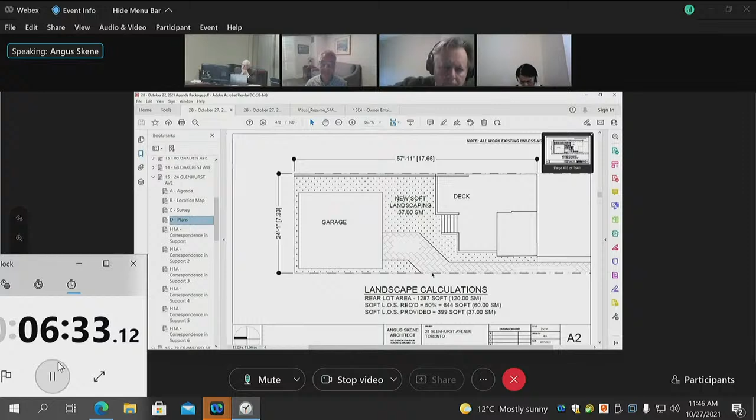All right, thank you. All right, Larry?

Just to follow up on that point, I do have personal experience with permeable pavers, and yes, the agent accurately says that is one form. I think what Nimrod and I and many panel members refer to when we talk about permeable pavers are the kind that use concrete blocks but employ what's called HPB, a granular material - not limestone screening, but a 1/4-inch crushed gravel - which acts as the bed for the stones and for the material that goes between the pavers. That provides a great deal of capacity for rainwater to permeate into the soil. That's kind of what we consider one of the standards, notwithstanding zoning inspectors may not consider that. We're just trying to get something more than traditional paving stone, which uses sand that restricts water from going through. So when we say permeable pavers, we're not suggesting you have to put in something that changes the percentage of your rear yard landscaping per the zoning examiner. What it does is incrementally improve upon the standard impermeable pavers in use in most situations across the city. So if that's helpful, that's what we're trying to get at - using construction material that allows rainwater to go through the cracks and discharge into the ground. I don't know, Chair, if that's helpful, but that's my experience.

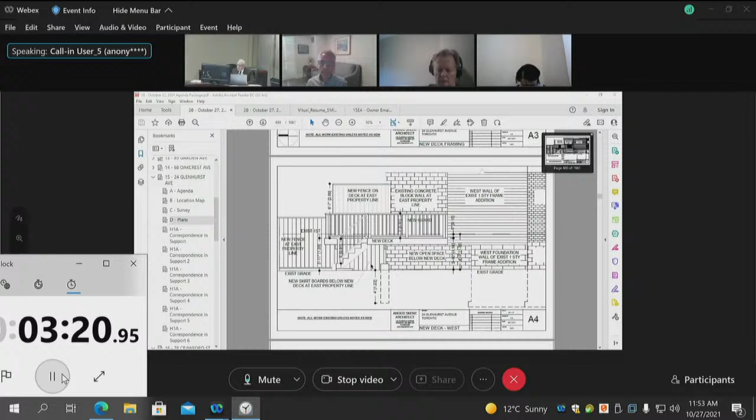That was one of them. The other was with regards to being set back from the wall of 22 Glenhurst. We also spoke about making sure there is no hardware or fence attached to this property, to 22. Right, so those are issues that are not before us. They are not variances. They are issues that perhaps, as was done between the neighbors... but let us go back to Mr. Skene and see what he has to say about these two issues.

Mr. Skene? Yes, I'm still here. Happily, in regard to one of the panel members' questions, the owner texted me several times about what HPB has installed to date and what they plan to install in the future. They would be happy if that is even attached as a condition to any decision.

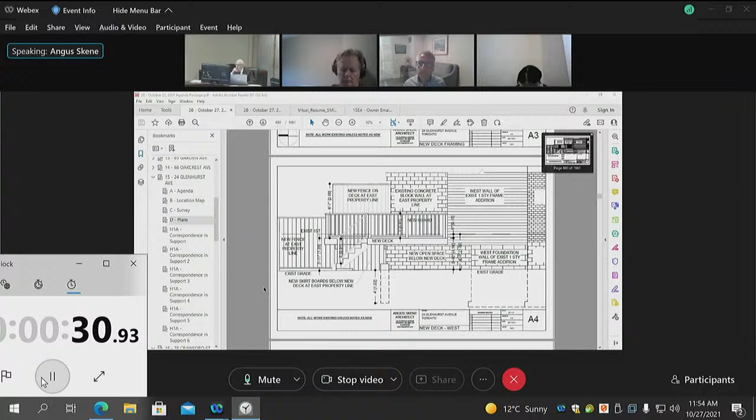And regarding the deck, the most useful drawing for the panel, and to answer the neighbor's question, is drawing A4. Sometimes these are a little confusing. It says existing first floor towards the left of the page, showing the first floor level of the house. If you slide over to the right-hand side, you'll see a dimension line going down 6 inches from the first floor to the top of the deck.

Below that, you'll see a dimension line of 3'10", 1.16 meters above grade. You can track those dimensions around. The deck is in compliance with the bylaw, but just to be straightforward with the neighbor, that tells you the height of the finished deck when it would be built.

The issue of the fence, there's a dimension line in the back showing 6'7", 2.0 meters, for a new fence on the deck at the east property line. That comes under the fence bylaw, which is the required maximum. My understanding is the owner of number 24 discussed this last night and is willing to reduce the fence height down to 1.5 meters if that's of interest to the neighbor. Regarding the building of this, if you flip to drawing A3, the page before this—no, go backwards one.

Unfortunately, a builder was hired who began this deck without a permit. There was a permit for the garage, and then they went over and started building the deck. The building inspector told them to stop, and that's when I became involved. So this detailed structural drawing is mine. I made it to make sense of what the builder had built and also to show how an actual deck would be built.

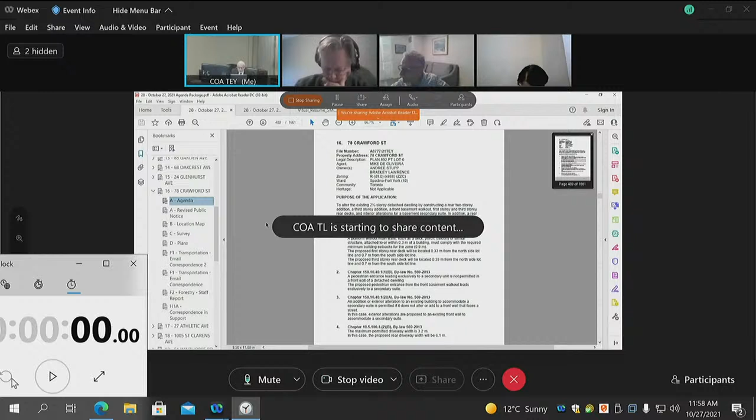Number 16, 78 Crawford Street. Purpose of this application is to alter the existing 2.5-story detached dwelling by constructing a rear 2-story addition, a rear 3rd-story addition, a front basement walkout, 1st-story and 3rd-story rear decks, and interior alterations for a basement secondary suite. In addition, a rear 1-story detached garage and driveway are proposed.

With this application, we have material submitted by the applicant, correspondence from Transportation Services, a report from Urban Forestry, and correspondence and support from 83 Shaw Street. We also have 4 form letters in support from 75, 83, and 98 Crawford Street.

Right, okay, Mr. De Oliveira. Hi, yes, I'm here. My name is Mike De Oliveira. I'm here acting on behalf of 78 Crawford Street, and I'm with Replacement Design, located at 911 Davenport Road.

So we need a brief presentation from you, Mr. De Oliveira. We have some opposition. Certainly. So we are seeking relief to the bylaw to create a third floor addition, a rear two-story addition, and a garage.

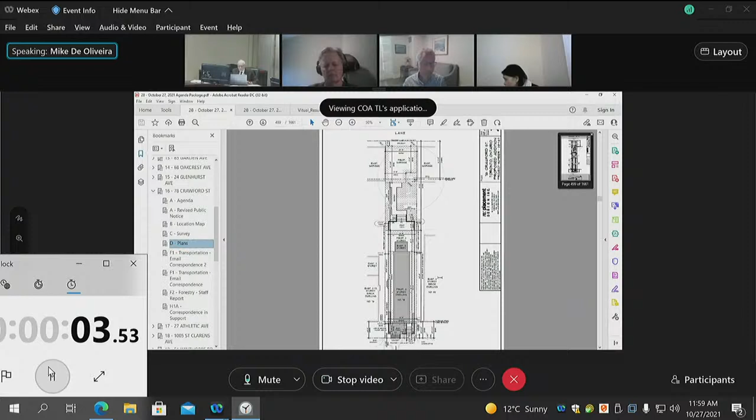The variances we are seeking today are in line with similar approvals the committee has made in the past, and our clients have spoken to many of the neighbors in the neighborhood, collecting the 5 letters of support mentioned, and they also received one last night from their next door neighbor at 82 Crawford.

The addresses on the street are a little awkward. To the left it's 76, then there's 78, and beside us on the right is 82. So that's the new letter we received yesterday. I just received confirmation that it was uploaded, but you might not see it at the moment.

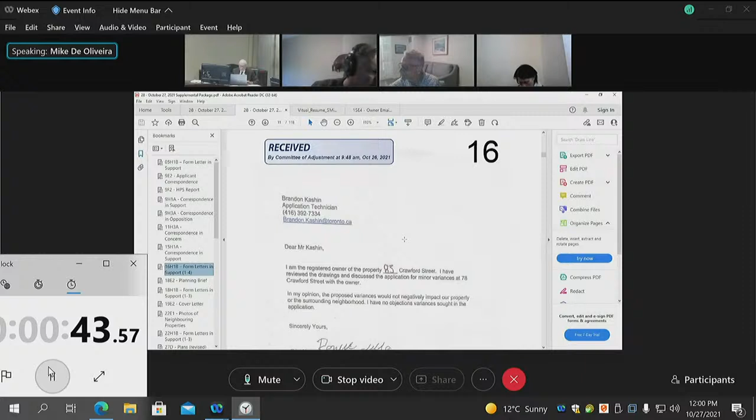Upon designing the addition, it was important to us and the homeowners that we limit the variances as much as possible. Although it might seem as if we have many given the look of variances, all of these are actually quite minor when you look at the current conditions of the existing property.

In many cases, we are simply continuing an existing condition, such as the landscaping in the front of the property and eave setbacks. In fact, even though we have a variance for soft landscaping in the rear, we are actually increasing the soft landscaping from 29%, which is the existing condition, to 38%.

Overall, as much of the area in the rear is already hard landscaping, our proposed addition and garage are simply being built over what is already considered to be hard landscape. Although we're asking for 1.1 floor space index, this is a difference of only 22.79 square meters, or 0.1 FSI in relation to the permitted.

We are also well below other approvals in the area. The example closest to us is 62 Crawford, a similar size lot. They were approved for 1.19. I'll open it up to any questions the committee may have, and to respond to the person in opposition.

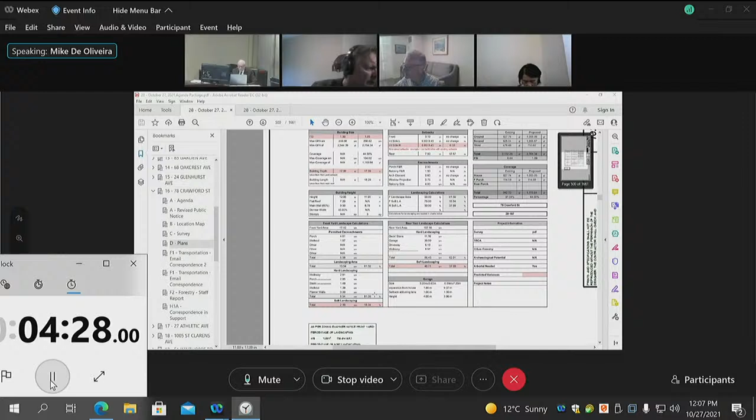So the existing soft landscaping in the front is only 35.86%. Overall, the actual number we're talking about doesn't change very much. The front is only 34.08 square feet currently. Our proposal is going to be 26.26. And the only difference really is for a little portion of walkway that needs to be added for the new basement stair walkout. Our basement stairs are going to be located fully within the existing front porch. We're just cutting back a bit of the front porch to allow for the stair down into the basement.

And this is pretty common throughout the city. 53, 55, 94, 103 Crawford, all of these are on the street and have similar types of basement walkouts. So this is pretty common, especially throughout this neighborhood. And although we do have a depth variance, this is well in line with other approvals that have been given in the neighborhood as well. 130, 144 Crawford, they have building depths that exceed 20 meters. We're only asking for 18. This is very minor compared to the 17 that's permitted.

So I think overall we're keeping the soft landscaping as much as possible here. I know there was a letter of objection posted from, I believe, the same neighbor as well that refers to trees. We've been working with an arborist from the get-go on this project to try and mitigate any injuries to the trees as much as possible. As you can see with our proposed garage, we're losing a corner in order to save that tree. I think we can all agree most people wouldn't be cutting off a bit of their garage if they could avoid it.

We've tried to do this to keep the tree in place. We're working with an arborist to do any necessary trimming needed to allow this to work while keeping the tree in good health. Our clients got possession of the property about a year ago, so no one's really been maintaining the trees for the past few years, and with all the overgrowth that can have adverse effects on the trees. Further trimming and working with urban forestry will mitigate any issues and push things forward while still giving the clients what they need. We also have no variances related to the garage.

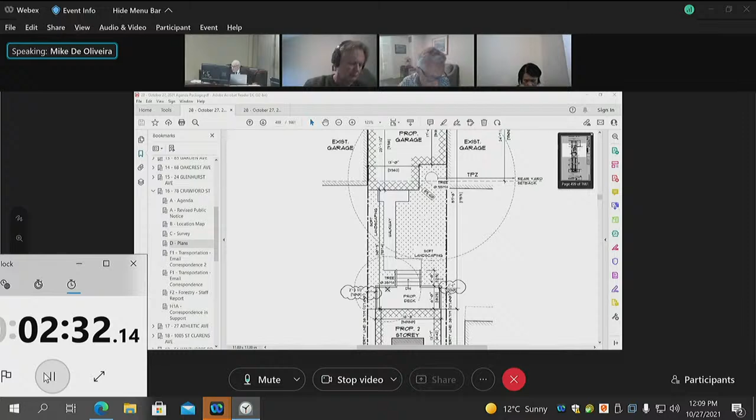I was going to ask you the same question about the front walkway, the walkout to the basement, if that could be permeable too. Yeah, that's certainly something the owners would be open to.

Okay, all right, thank you. Any further questions, panel?

All right, do we have comments or a motion? Yes, Yim?

Looking through the list of variances, quite a few of them are contributed by the existing condition. And with Neil's suggestion of permeable paver walkways front and rear, I am in support of the proposal because this is a very dense residential area, and I do not think the addition will be out of context. I think this creates not too much negative impact on the neighborhood.

All right, yes, Nimrod? So maybe if this were to be approved, we could add a condition that ties any approval to the site plans, specifically that the walkway shown in the rear yard be a permeable material, and that the walkout in the front yard also be a permeable material as shown on the site plan. Yeah, that's true, because I noticed the walkway in the rear yard is being remodeled anyway, so I think maybe we should try that.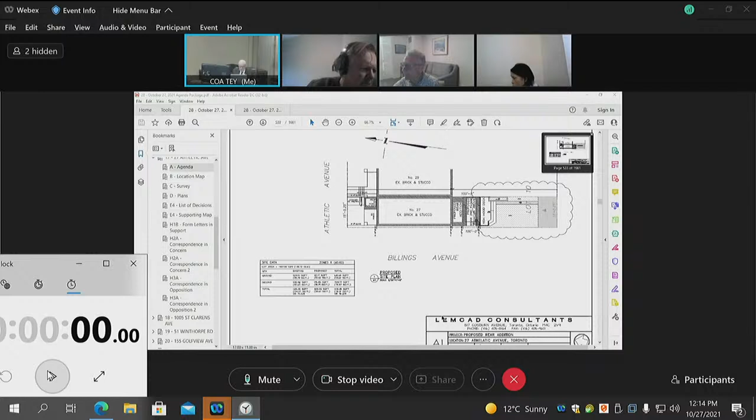Mr. Mastrandrea. Yes, good afternoon, members of the committee. My name is Leo Mastrandrea. I am the agent for the owners at 27 Athletic. Did we get your address, sir? My address is 817 Cosburn Avenue. Okay, can we just have a brief presentation because we have some opposition?

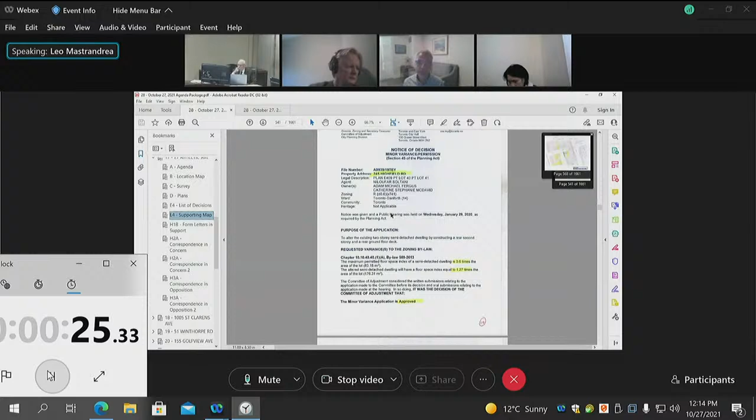Yes, so we're here today for 3 minor variances. As mentioned, we submitted 9 letters of support. Our proposal is consistent with what's been approved here at the Committee of Adjustment. If you can refer to my support material, page 1, outlining the floor space index map, page number 1 -- there are 14 properties with floor area all above what we are seeking. In addition, community planning had no concerns, and forestry had no concerns. Variance number 3, our partial enclosure of the front porch is consistent with the built form. If you can refer to page 3 of my support material.

All the ones with the X's, which I believe there's 13 or more, all have existing enclosed porches. And in addition, we comply with the building length, the rear yard setback, the front and rear yard landscaping, and the building height. If you have any questions, I can answer them for you.

So what about the floor space index? I don't recall you mentioning that, or the floor space index. The floor space index is on map number 1, which has 14 similar or above what we're seeking, so it is consistent with the neighborhood.

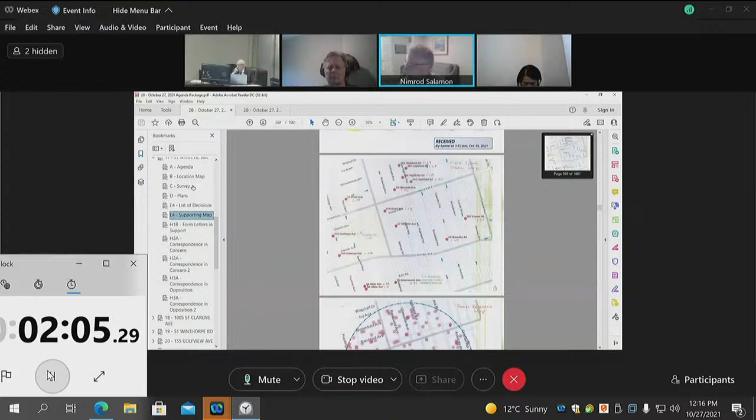Okay, thank you. All right, let's ask the panel, any questions? Yeah, I did have a question about the floor space index. Can you just clarify, is the existing floor space index at 0.76 FSI? Yes, it is. And what's the size of the proposed addition? How many square meters or square feet is being proposed for the addition?

Total of 28.61 square meters. Thank you.

Okay, Mr. Ho, Ms. Chow? Yes, good afternoon, Mr. Chair and panel members. My name is Ho, we're getting an echo, so I think you have to turn something off. I don't know how to turn it off. Okay, maybe my wife has to turn off the other PC. Okay, my name is David Ho.

I live at 91 Billings Avenue. Today I'm concerned about the eavestrough of the new addition, because I don't see on the site plan or the blueprint that they mention it. Right now there was a shed built next to the new fence which does not have the eavestrough, so the rainwater pours onto the sidewalk or the pedestrian walk, which will cause a problem, particularly during freezing rain. So that's one of my major concerns. I would like to know whether the builder or architect has that eavestrough built into the new addition and drains it properly to the grassland.

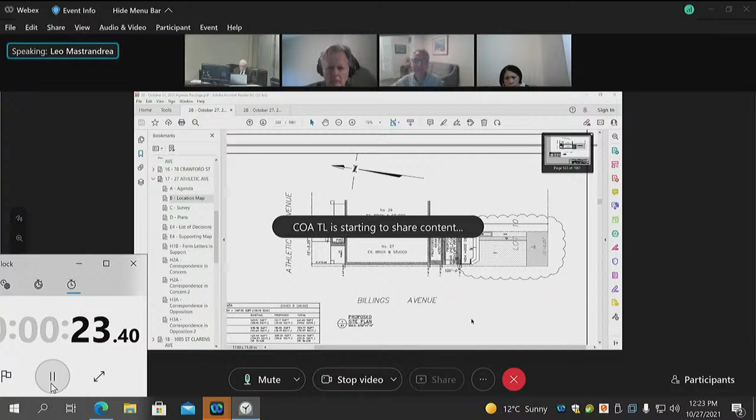So what I'd like to do is possibly move the rear addition an additional 1 foot towards the west of the property, as opposed to coming right up to the property line at 29, which would reduce our floor space index to 131.28, and it would be at 95%. That would be something we could make a change if need be.

She also spoke about the afternoon sunlight. Our addition is to the west of 29, so they would be having sun basically all day up until the evening. That's when they would not have the sunlight, but by that time I think it would already be past our addition. As far as the other neighbors' concerns regarding the eaves trough, part of the building permit process forces us to drain our water on our own property, so yes, we will look into that and make sure there's no issues.

Again, I'd just like to mention that we do comply with the building length, the building height, and the front and rear yard landscaping. Any questions, panel?

Yes, so Nimrod, I just wanted to clarify, was the applicant suggesting they're looking to make a change to variance number 1? Correct. So that would be to make it 0.3 meters? It would be 0, it would be from the east side, the party wall side, number 29. So that would be the east side. So it doesn't affect the variance except for number 2, which would change our floor space to 131.28, and it would be 95 instead of 96%.

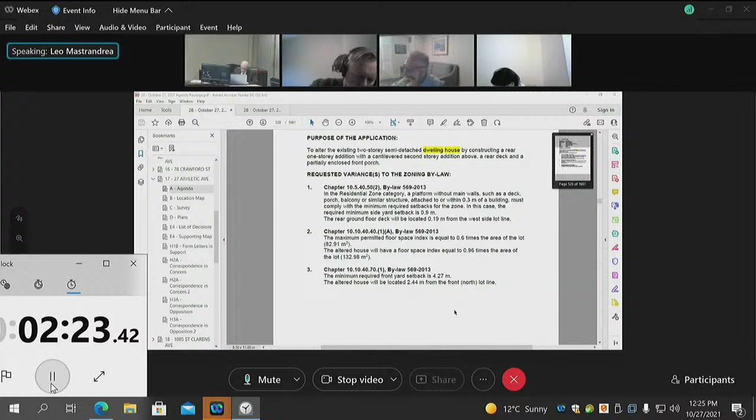Thank you. Okay, any further questions? Okay, do we have a motion?

Yes, Larry? Chair, I think this is actually a fairly modest two-story, well, it's actually a story and a half addition off the rear. It's only, I think he said 28 square meters. I think it's an act of good faith to move the addition off the lot line a little bit. I think that might help a little bit. It's a corner lot, so the impact on the neighborhood and the streetscape is, I think, relatively minor and modest.

I think we should, I'm prepared to move a motion to approve this one, subject to altering variance number 2 to instead read the altered house will have a floor space index equal to 0.95 times the area of lot, or 131.28 meters squared. Yes, Jim? I will second that. All right, all in favor? Have your approval. Thank you.

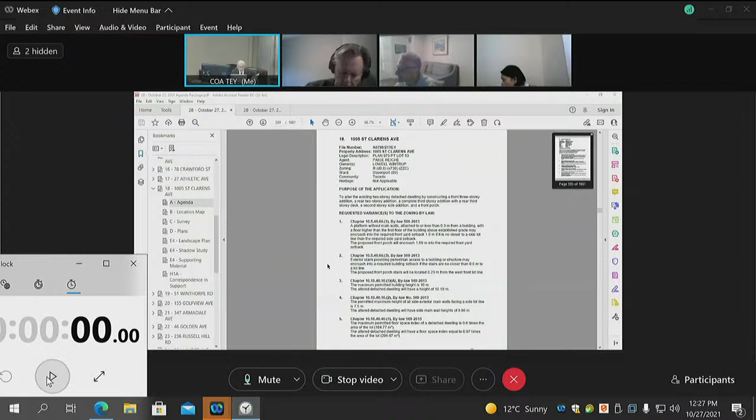1005 St. Clarens Avenue. Purpose of the application is to alter the existing two-story detached dwelling by constructing a front three-story addition, a rear two-story addition, a complete third-story addition with a rear third-story deck, a second-story side addition, and a front porch. We have material submitted by the applicant and correspondence in support from 1003 St. Clarens Avenue. Through you, Mr. Chair, we also have correspondence from the agent as well as letters in support from 1001, 1007, 1011, and 1041 St. Clarens Avenue. Thank you.

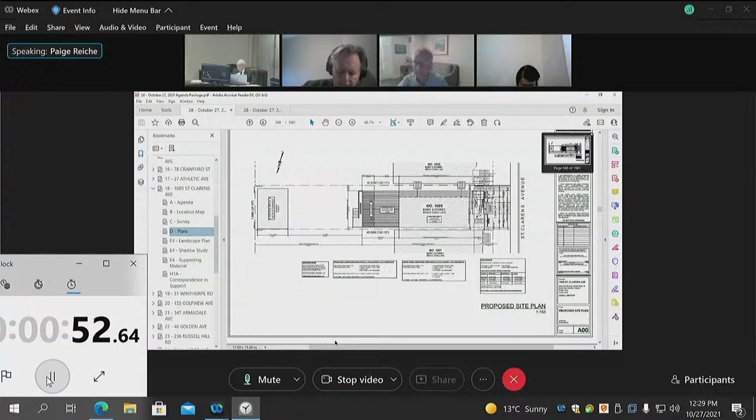Okay, Paige Reiche. Hi, committee members. We can't hear you. Sorry, can you hear me now? Is everything? Not very well. You need to speak right into the mic. Can you hear me okay now? Yes. Okay, hi committee members, I'm Paige Reiche of Bloom Architectural Design, located at 222 The Esplanade, Unit 1121, Toronto, Ontario. Sorry, you're a bit muffled, can you try this again? Paige Reiche of Bloom Architectural Design. No, sorry, we're having trouble hearing you. Paige, if you can maybe use a handheld device or speak closer to the mic, that would probably help. I think there's something wrong with my mic, not sure if you guys can hear me. Let me reconnect and I'll be right back. Seems to be okay now. Just speak a little louder. Okay, Paige Reiche of Bloom Architectural Design, located at 222 The Esplanade, Unit 1121, Toronto, Ontario, and I'm the applicant on... Okay, so, through you Mr. Chair, I can give Paige a call if that would be helpful to get her, just to hear her more clearly. Yeah, well we just need a little more volume. Yeah, okay. So Paige, I'm going to give you a call through the number provided.

Hello? Hi, Paige. Sorry, there's an echo there. Can you hear me okay? Yes, it's better. Okay, great.

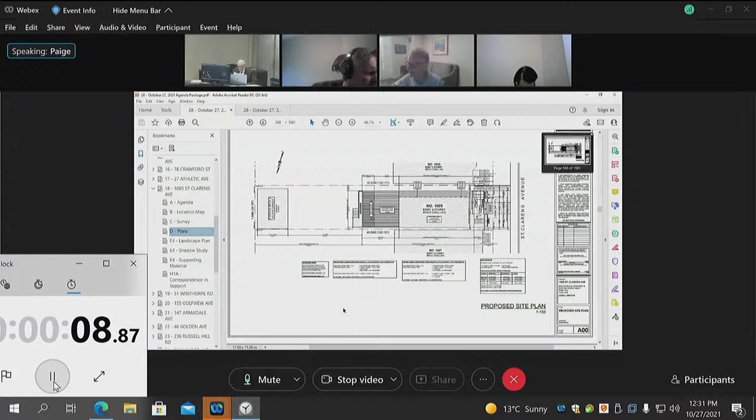Okay, so I'm not sure if you heard my intro. My name is Paige Reisha, and I'm speaking on behalf of Balloon Architectural Design, and I'm the applicant and owner of 1005 St. Clarens Avenue, located at 222 the Esplanade, Toronto, Ontario.

Okay, let me just ask you one question. We have an Amy Shepherd listed on our list as an agent, and you listed as an agent. Who is Miss Shepherd, and is she supposed to speak? So Amy Shepherd is the planner, so she's just a support member for this application. Okay, so you're going to speak, and that's it? That's correct. Okay, thank you.

Please give us a brief presentation, because there's a lot of variances here. Yep, no problem. So the proposed work - the applicant applied for a building permit several years ago and is in the middle of construction. However, he decided he wanted to make some changes to that application. So here we are today, and those changes are as follows.

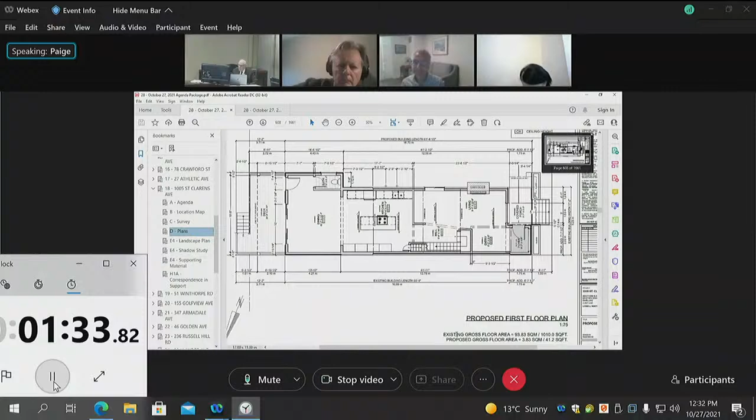If you can pull up the drawing, let's start at the main floor, which is drawing A10. We have a small addition to the front of the house - a small porch enclosure of what is already existing for the porch, converting that into a foyer. That's all that's going on the main floor.

The second floor has a bit more of a complicated addition, that would be on A11, the next page. We are continuing the front porch enclosure area, and that's going to extend up to the second floor and the third floor at the front of the house. Then we have a side addition that will align with what is already existing on the back of the existing house - a bump out noted in gray that aligns with the existing house at the back. There's another addition on the second floor to extend the existing house by 2.09 meters, extending the full width of the house.

And then on A12, one more sheet up, we will be adding a proposed third floor. This third floor will also house a rooftop deck that will partially go over the existing two-story house and the added extension of that.

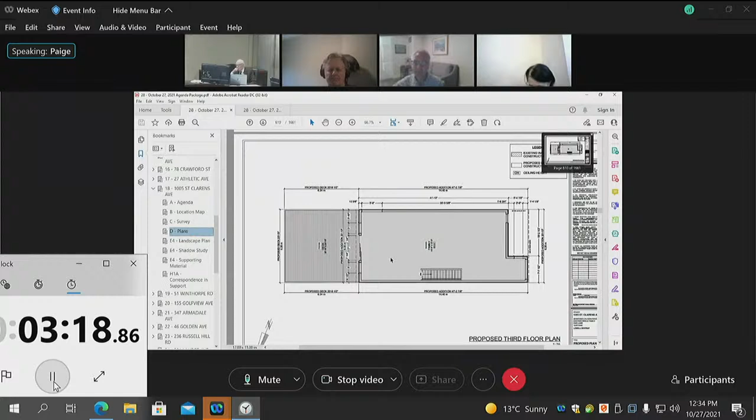Right, okay, anything else you wanted to say? No, that would be all the explanation for the design purposes. We also submitted a report done by Amy Shepherd, the planner, outlining previous cases in the neighborhood. We believe the proposed design is consistent with what has been previously approved by the committee. This is a very diverse neighborhood with several additions and new developments, including 3 stories, increased building heights, reduced setbacks, and front porch enclosures. We've received 5 letters of support from surrounding neighbors, including the immediately adjacent properties. We believe the requested variances are minor and in keeping with the neighborhood, and do pass the 4 tests of the Planning Act.

Right, thank you. Panel, any questions? Yes, Larry - I noticed that the rooftop terrace or second story terrace is off the family room, so it implies it'll get fair amount of use. To the agent, are you planning to screen that? Yes, so the sides will be screened on either side for the adjacent properties, consistent with what is required for the bylaw - a 6-foot fence or screens on either side of that.

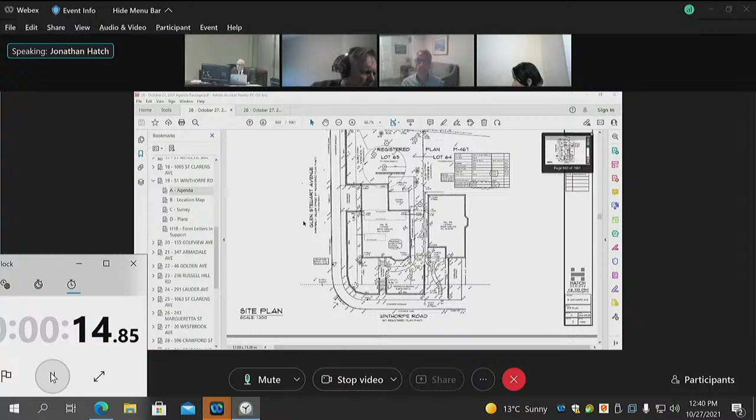Panel, any questions? Okay, we have a motion. Yes, Yim? I look at the application. I agree with the applicants that the variance is minor, and it's also on a corner lot. I think they have the support of the next door neighbor, and I do not think it will create negative impact in the neighborhood. So I'm in support. I move for approval with no conflict, I do not believe. Okay, do we have a seconder? Nimrod? Right, all in favor? You have your approval, sir. Thank you.

Number 20. 155 Golfview Avenue. Purpose of the application is to alter the existing 2-story townhouse by constructing a rear 2-story addition, a rear basement walkout, and a rear ground floor deck. With this application we have material submitted by the applicant, and reports from planning and urban forestry.

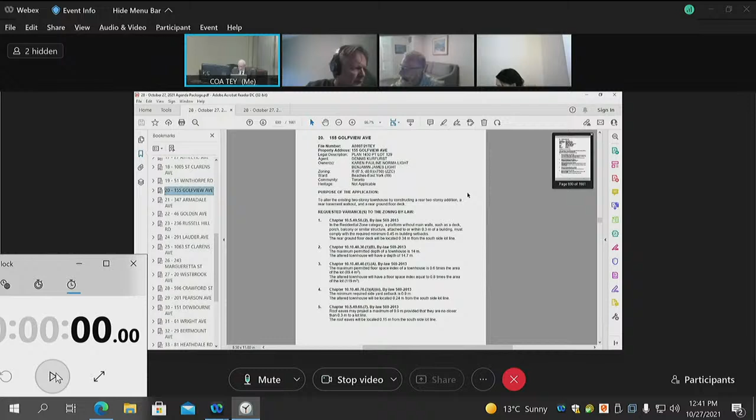Mr. Kerfurst. Yes, good afternoon. Good afternoon. Can we have your name and address for the record, please? Yes, it's Dennis Kerfurst, 68 Whistle Post Street, Toronto, Ontario, M4E3W8. All right, thank you. I don't think we need a presentation from you. Do you have something to say to the panel before we take it into committee?

Not really, other than the fact that it is a very small existing home. The owners there are a very young couple starting a new family, and just by the nature of the existing drawings and the footprint of the property, you can see it's probably one of the smallest homes I've ever been in. So it is unique to that extent, and basically it speaks for itself. These people need somewhere to be able to raise their family.

Okay, so staff report suggested a privacy screen on the deck. Do you have any objection to that? Absolutely not. There was currently an existing deck there which did have the privacy screening in place, which we will replicate onto the new deck. Thank you. Panel, any questions?